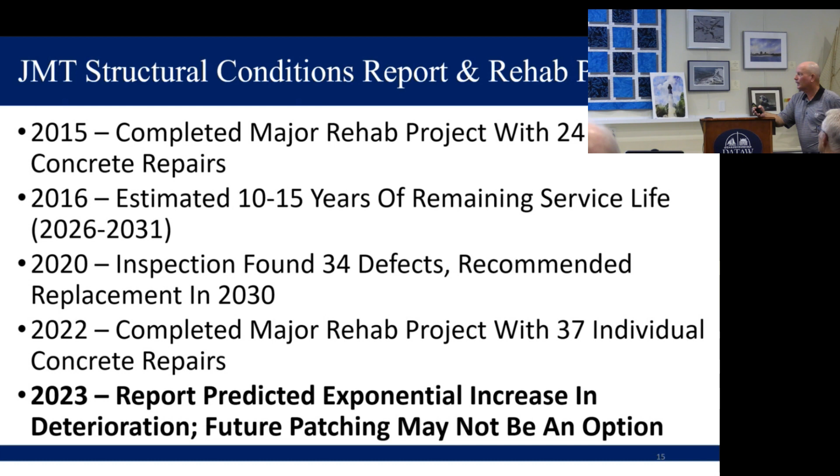Okay, exponential, and future patching may not be an option. That's a statement from their last report. Basically what it says is due to the delamination and strand corrosion—that bridge is a box beam construction, like a big concrete box with strands of wire, cabling, that holds it together. It's taking up salt water, and the chloride is causing the stranding to corrode. They say that it's happening at an exponential rate, and they feel the bridge is at that condition.

So hence that's why we're here today. The photograph on the right shows the corrosion of the strand supporting structures of the box beam concrete underneath the bridge. On the left is a typical repair that's been done over the years. This part is where they've cleaned it off—you can still see the corrosion on the cabling. And that's the actual wire lath they put up to apply the hydraulic cement to make the repair.

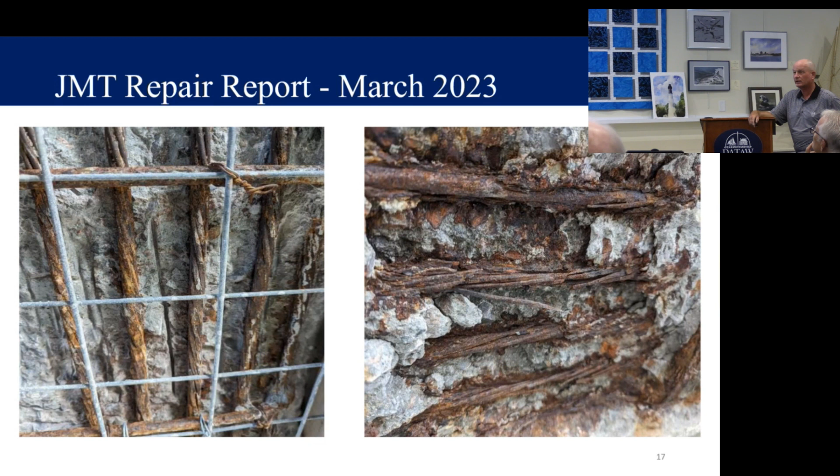So let's talk about elevation, which is important for what we need to do in the future and where we are today. The current substructure of the bridge is at high water basically. When we have really high tides, the water touches the bottom of it and splashes up, and it will continue to cause that deterioration. It's not going to slow down, as JMT said in their report. When we have storms or high water events like king tides, that puts the roadway at risk as well. The current bridge deck is 1 foot above the 10-year storm surge, and 18 inches below the 50-year storm surge.

Now, as I said, I've been here since 2003, and we've had two events that have overtopped the bridge. One of them was Matthew, and what was the other? So that bridge has been overtopped twice.

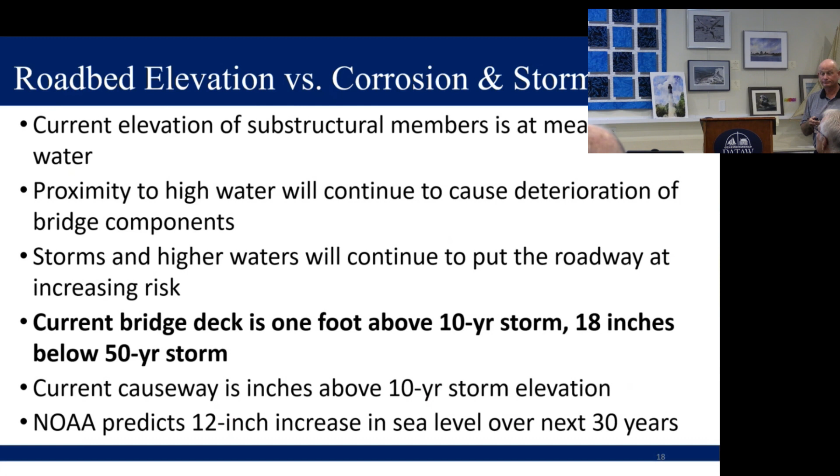Now, the current causeways are just inches above that 10-year storm level, and NOAA predicts that in the next 30 years we're going to have about another 12 inches of sea rise. Got to take all that into consideration.

So we also did geotechnical analysis of the causeways—remember, it's the longest portion of the bridge complex. You may have seen a big rig out there one day, like a drilling machine. It did borings all the way down into the subsurface of the causeways. What we found, and this is a civil engineering thing, is that we've got some issues with the asphalt. The causeways are up and down in elevation, and if we decided to raise them, we'd have to widen them. But the most concerning thing was that when we bored down to the 7-foot depth, we found that the causeways are unstable.

So if you were going to pile dirt on something that was unstable, do you think that would be wise? No. So based on all of this analysis and the impacts from the risk assessment we shared with you today, the bridge needs to be replaced within the next 5 years. That's the goal.

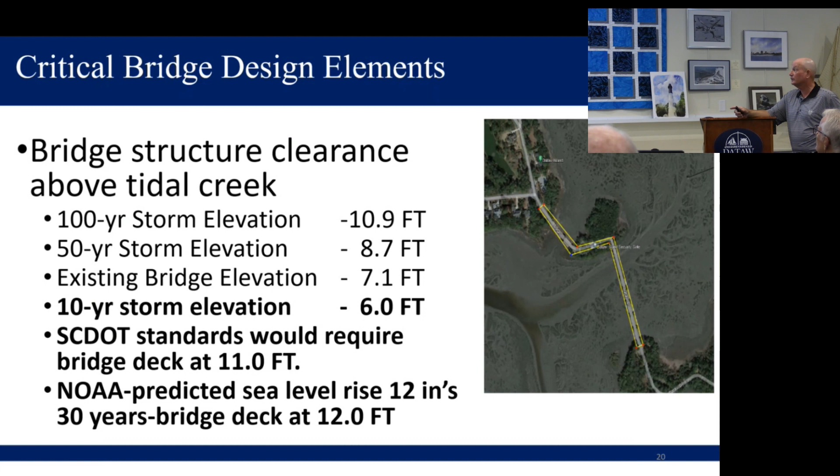So let's talk about where our elevations are. I talked about that 100-year storm—that's at 10.9 feet elevation. 50 years is 8.7, and our bridge is at 7.1 feet. The 10-year storm is 6. Do you see how close that is? South Carolina now requires that a bridge deck, if you deal with DOT, has to be at least 11 feet minimum above the existing elevation, and again, there's that 12 inches. So we've got to take that into consideration of anything that we do.

So let's talk about some things that we looked at, possibilities of what could happen.

First of all, we talked about raising the causeway. Now, raising the causeway would cause us to have to widen it because we have to be able to carry the dirt, the load of the dirt. But also what we found is there's regulatory requirements that are different for that, and also maintaining traffic during construction and dealing with the utility crossings.

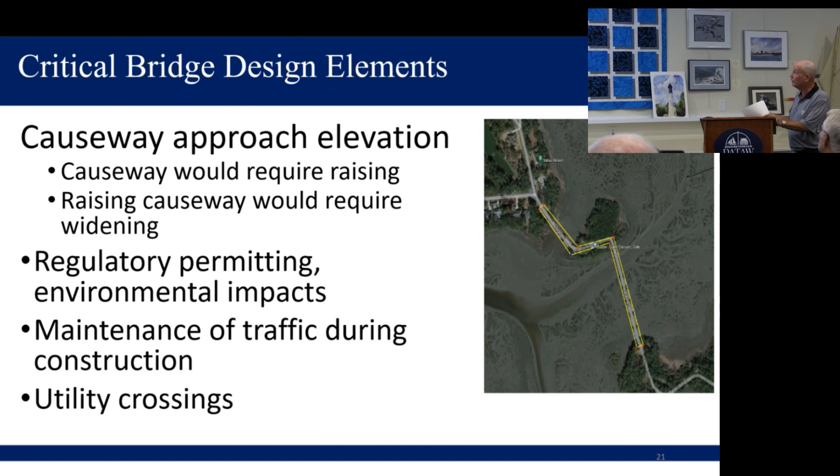Now, this is your current Google Earth view of what you drive on. This is Polawana, this is Dataw Drive, Polawana Island. Here's the causeway, there's the bridge. This is called Bobb Island, it's where the guardhouse is. Then you go across this secondary causeway, and then you're on Dataw Island.

All right, so we looked at three options here. We said, okay, what can we do and what we cannot do? Let's look at this. So the first option we looked at was raising the causeways, putting in a temporary bridge, and then doing a bridge complex later.

Bottom line, we looked at this. It has a tremendously high cost, but when we had that conversation with the regulatory agencies, they basically told us they would not issue us a permit to do this. And the reason why is because they do not allow you to infill the marsh anymore to protect the ecosystems of the marsh, and I'll show you why that wouldn't work in just a few minutes. So that was one thing we looked at, and we said we can't do that.

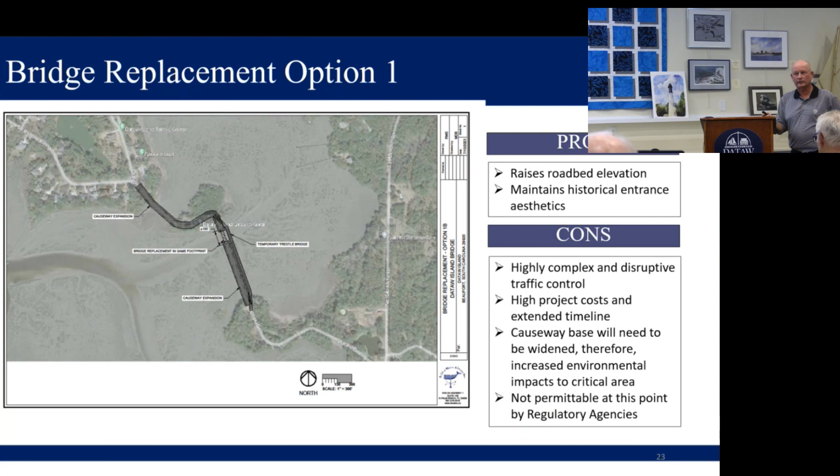Also, it'd be very expensive. Let me give you an example. If they decided that they would give us a permit, we would have to go in, build a temporary trestle bridge, which would be a bridge beside the other bridge. We would have to fill in one side of the causeway while you drive on the other side. And when we fill it in, we have to let it surcharge or settle for 9 months. Then we pave that side, then we surcharge the other side, and you have to wait 9 more months. That's 18 months before we could even finish building the bridge. So long timeline and a traffic nightmare.

But that's what that would look like. That's your current causeway, and kind of we looked at that from that perspective, and we just can't get that done.

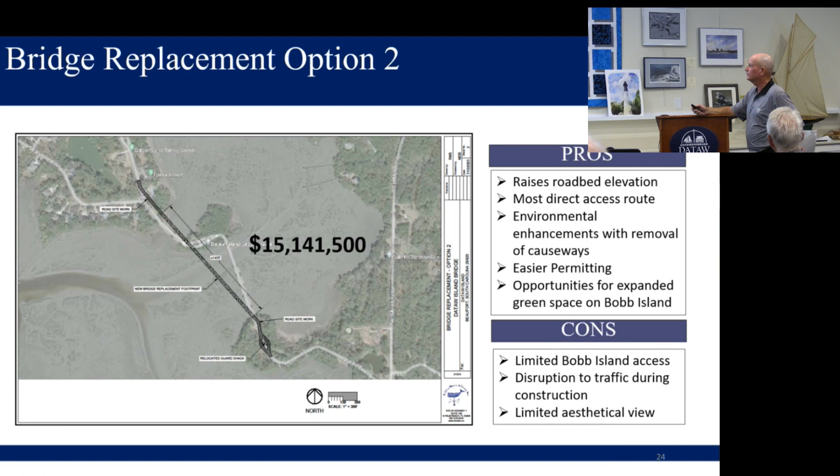All right, so this is what it looks like in a more blown up view. You can see now one of the things this does not give you is it doesn't give you that aesthetical view that you have now driving across the causeway on the right hand side, because you're going to be blocked more because you're on the left hand side versus the right hand side of the current complex.

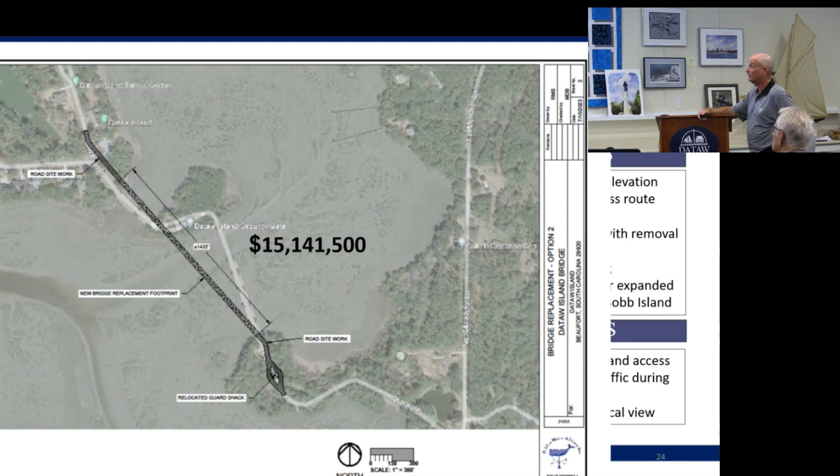All right, let's look at option 3. Option 3, it's in the same location. The guardhouse is here.

This goes on the right-hand side of the current bridge causeway. We land on Bobb Island and build a road, and then we pick up a secondary bridge and we land it on the right-hand side near the guardhouse.

This gives you that aesthetical view. You'll be able to see more back up this way because the clubhouse is to the north here. This also gives you a nice curve, and it gives us access to Bobb Island because we build a road on Bobb Island.

We don't build an actual bridge on Bobb Island, we build a road. It does have a little cost implication because there is more linear feet of bridge.

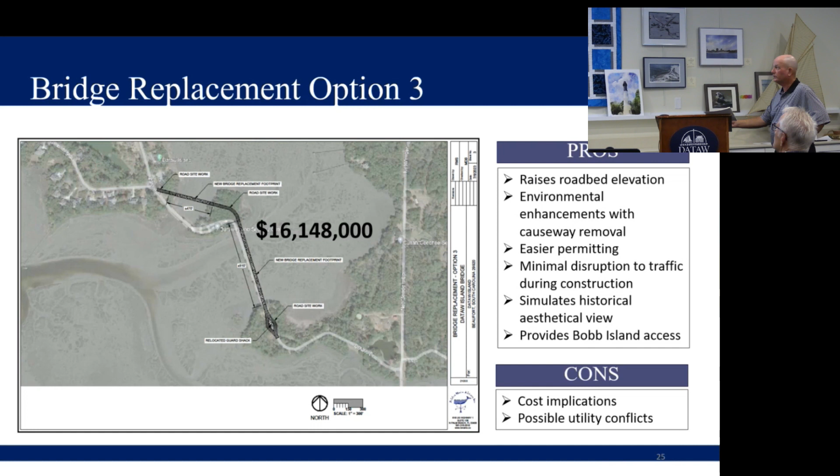This is much easier to build and will cause minimal disruption during construction, because we just do the tie-in over here while you're driving on this side, and we do the tie-in here while you're driving. However, this one comes with a more hefty price tag of $16,148,000. That's what it would look like from an aerial view from overhead.

Real quickly, this is what your current system looks like today: Causeway Bridge, Bobb Island Causeway. This is what it would look like. So you see, we bridge all the way across, land on Bobb Island, and pick up bridge on the other side.

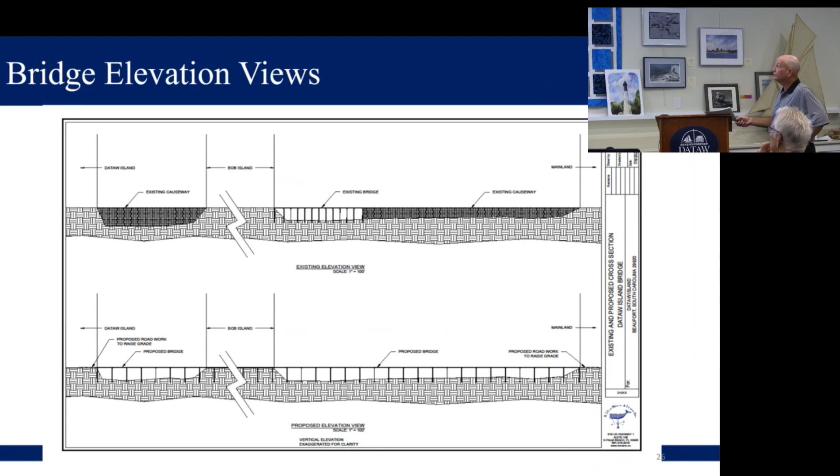This is why you can't. This is why you cannot receive a permit. This is the current causeway. This would be how much we have to fill in order to build that bridge.

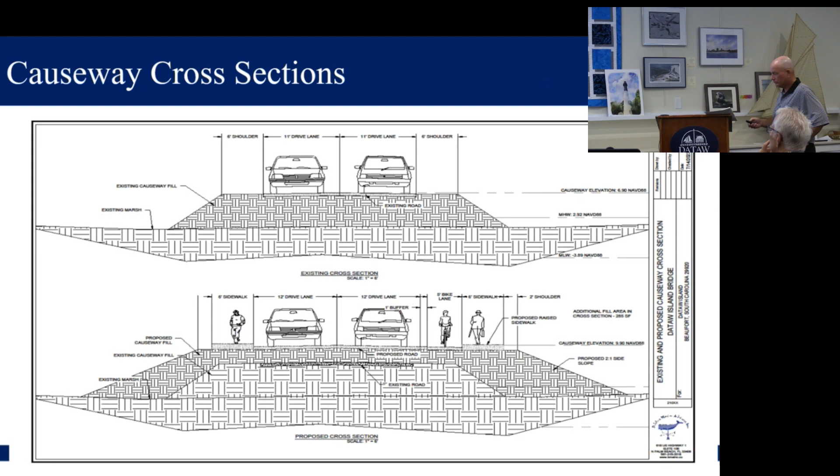This is what your current bridge looks like today. Our design is to make it a little bit wider and also add a bike path walk lane to that bridge so you can walk or ride all the way across. We do have some people who ride their bikes off the island, so we've included that in the design.

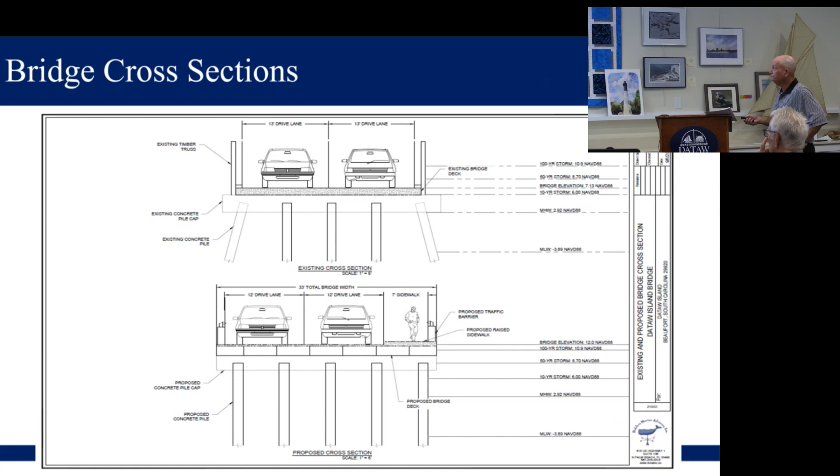We'll bid it in '25. We'll award the contract in January '26. We'll start building in March of '26 and finish in the fall of '27. That's how long it takes to build it.

I have stressed with the architects at BMA and the engineers, can we do it sooner? We can do it a little sooner. We might can get it finished in March or April of '27, about 6 months earlier. I think we can press the schedule.

Let me answer a couple of key questions before I turn it over to Bill Paddock, who's going to come up here in just a moment. Some people would ask this simple question - it's a great question, it's perfect - why can't we just replace the bridge in its location and leave the causeway?

It's lasted 35 years. They've replaced it. It could last 35 years. I'm not going to be here 35 years from now - why would I care? Right?

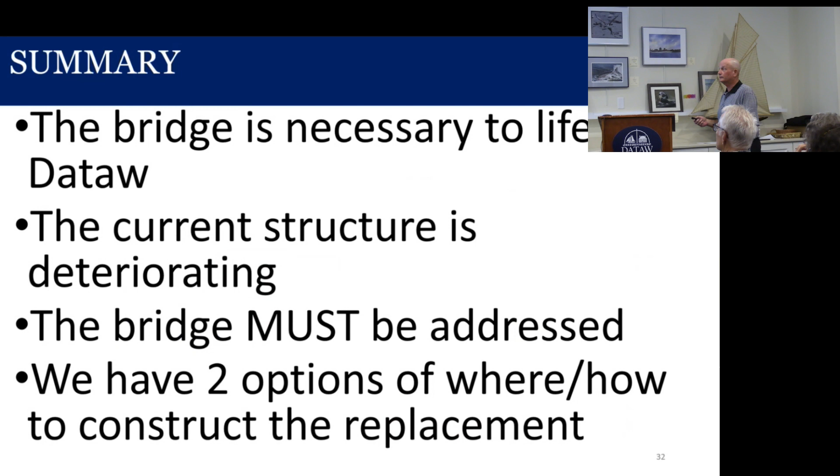So with that, I'm going to turn it over to Bill Paddock. Bill's going to talk a little bit about the water. Thank you, I'll lay it right there, Bill.

Good afternoon, folks. My topic is a little easier than what you just heard. What he talked about was necessary - this is aspirational. The rest of what you hear about today is going to be aspirational.

The committee I worked with - I've been here 25 years on the island. I love this place, and I'm glad we've done what we've done over the years to get where we are, but we've got to keep looking at more things.

Clay and Chris both served on the DIOA board and have been an important part of this project. The other three people have just been people who care about the beauty of this island and can help us make it more attractive for all of us.

Mike Hieronymus helped us with some of our sketches. The Rimkus engineers helped us look at the marina building, and I'll talk about that in a minute. Mike Murphy at Preservation Tree has helped us look at the trees and what can or should be done to care for them. He's been working on this island for probably 30 years helping us maintain our trees, and has been a great asset to many of us.

As Ted said, this was an interest expressed by all of you in the master plan report and the member survey, and Wood and Partners have all said we can do better at the Morgan River waterfront.

When we started to look at this, we realized we've got three different, very distinct, separate operations up here, and we thought we ought to try to pull them together. There are no walkways between these now - we think we need to add walkways to make it more coordinated. The property, about 11 acres, runs along behind the homes on Sparrow's Nest, behind a home up in this area, down here, and then follows the golf course back here. That's the North End campus, as we call it.

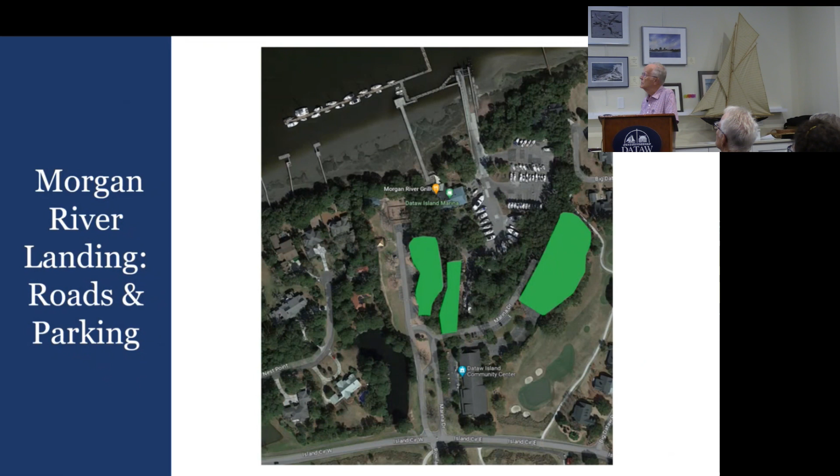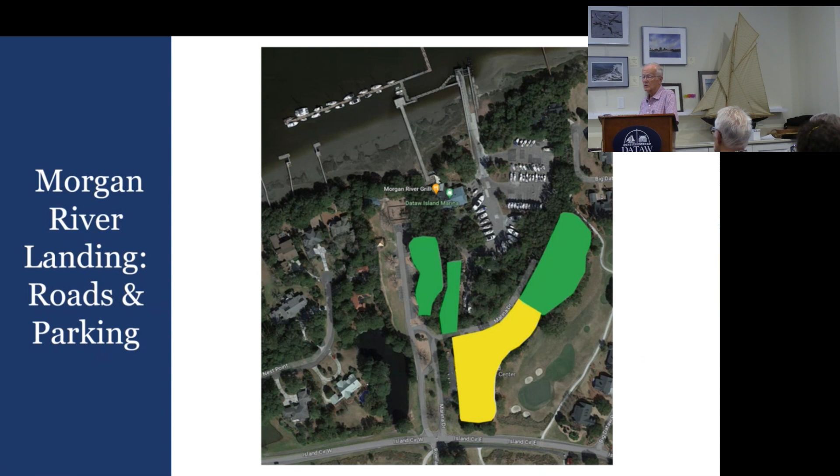Because we have three separate operations and the potential need for more parking, we had to look at the whole process - the whole enchilada - of what we've got up here. That's the green space we want to preserve; it's been wonderful and we don't want to get into it if we don't have to, so that's an important part of it. You've also got the community center taking up this space, the boatyard taking up that space, and the roads currently there. That's what we have today, which means the only part we've got left to really work with is this space back in here, since all the other stuff is taking over a lot of the other space.

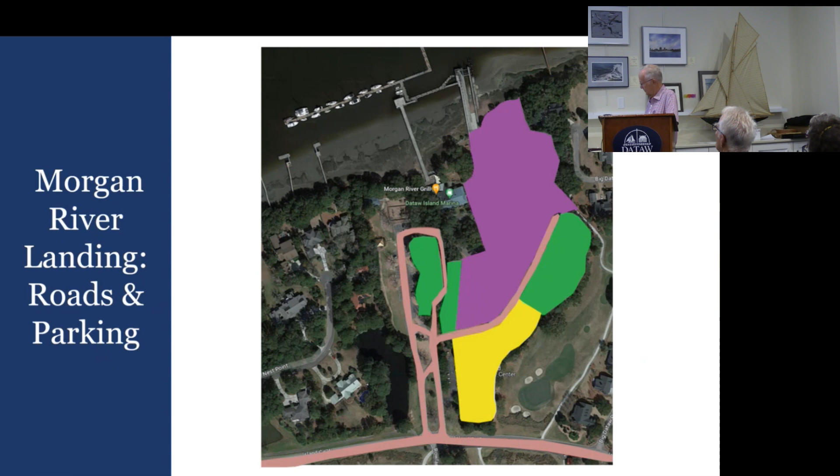I'd point out here that the gazebo is back in here, and the Morgan River Grill building is over in this area. When we looked at this, we said if the community center expands, that's going to mean more parking. If the wet slips or the dry stacks expand, that's going to require more parking. And if you do anything to expand the waterfront building, that's more parking too.

So we need to get to 165 spaces - this is the county rule in terms of how we're using the space. We've got to get to 165 parking spaces, which can be a combination of cars, golf carts, and bicycles. But we've got to make provision in our plans for all that to get any kind of approval. We want to do everything we can to preserve the trees and green space, and we want to provide walks to get from one part of the area to another.

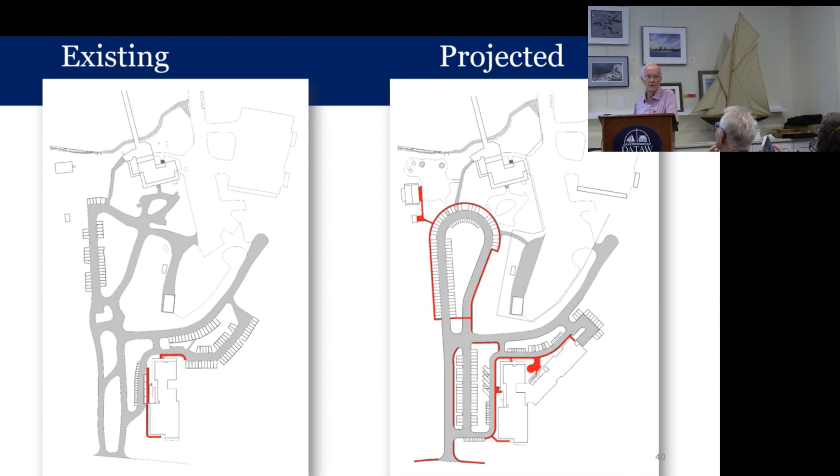Where's the waterfront? Anybody see any water there? We think there's opportunity for improvement. As everybody else has said before, we think these two facilities should come down.

Move the playground to someplace else on the island. The Common Grounds Committee has been given that challenge to see what everybody wants to do and where that should go. And as I said a minute ago, we think the gazebo ought to be moved back. This happens to be an area you could no longer build in today because of the setback requirements in the county, so we could not build it where it is today.

Trim the trees. When we're talking to Michael Murphy, there's some trimming we need to do out there because the trees are not healthy, and we can do something to make sure the health of the trees is good long term. We can also do some trimming for a better view, which is important, I think, for all of us.

Maybe put a fireplace, a large screen TV up there, so a group of your friends can watch a football game or a tennis match. A much easier, more comfortable gathering place. We want to expand it from the 1,500 square feet we have today to about 2,400 square feet, and move it back so we can take care of the setback rules in the county.

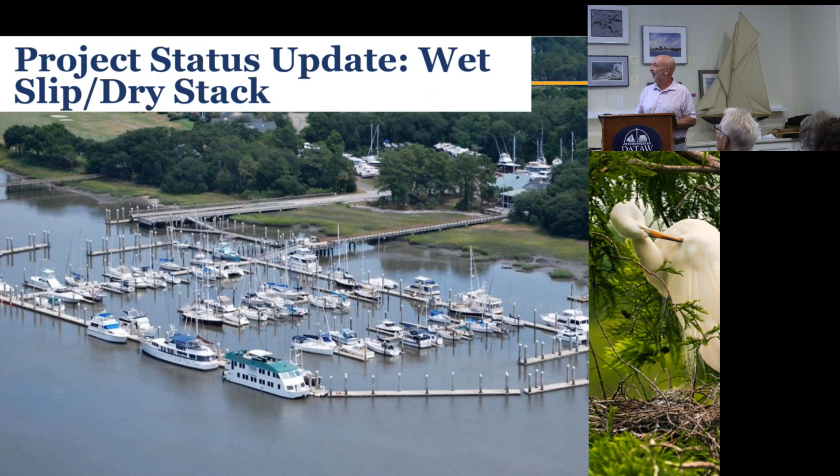All right, so my name's Scott Johnson. I chair the Wet Slip Dry Stack Advisory Committee. On the committee we had a great team of people: Martha Keat, who's here today, our DIOA board member, Al Deedle, Andy Shepard, Max Stone, and Rick Brown. All are very experienced boaters, very familiar with the operation at our marina, the functionality of it, what's working, what's not. They also have a lot of experience on many other facilities, marinas and marine facilities up and down the East Coast. We also partnered with BMA.

BMA is a marina engineering and design firm. They also worked on the bridge, with a lot of experience building marinas up and down the East Coast, and they've even done several marinas for private communities like us. Our objective, as our very innovative name would suggest - the Wet Slip Dry Stack Advisory Group - we looked at some wet slips, we looked at dry stack, but we also looked at everything else related to boating: all the docks, how things are handled, the boatyard, the fuel systems, what's working, what isn't, what needs improvement, how it's going.

So I think in the last 5 or 6 years there's been a lot of new faces coming here, so I think it's worth taking a minute to look at where we started with the marina, where we are today, and then where we're heading.

This is a picture of the marina around 2013, 2014. We didn't own it then. It was probably about a 90 slip marina, plus or minus. You can see here probably around 60 boats - that was pretty consistent, very busy, a lot of activity down there. We also had a dry stack - can't quite see it here, but back then we probably had 30 or 40 boats in the dry stack.

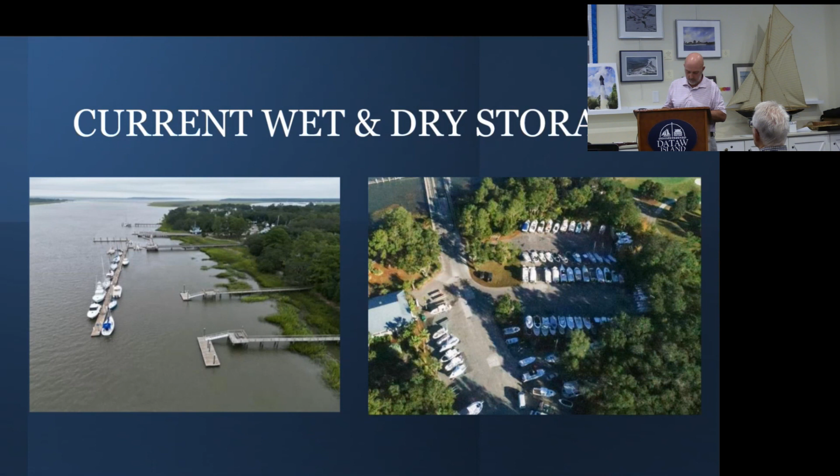So basically, the marina's back in business. It's very vibrant, very busy. It's a multi-million-dollar asset that you all own, and I think over the last couple of years it's actually paid for itself, covering its own costs including debt service. But with all that success, it's now exceeded its current capabilities, and the age is starting to take its toll down there.

So what did our committee find when we looked at this? Currently about 20% of our members on the island own boats, that's about 200-some-odd boats, and we've got more coming. We continuously get feedback from people looking at boats, on a waiting list to get one, or in the middle of shopping. So it's a very active time.

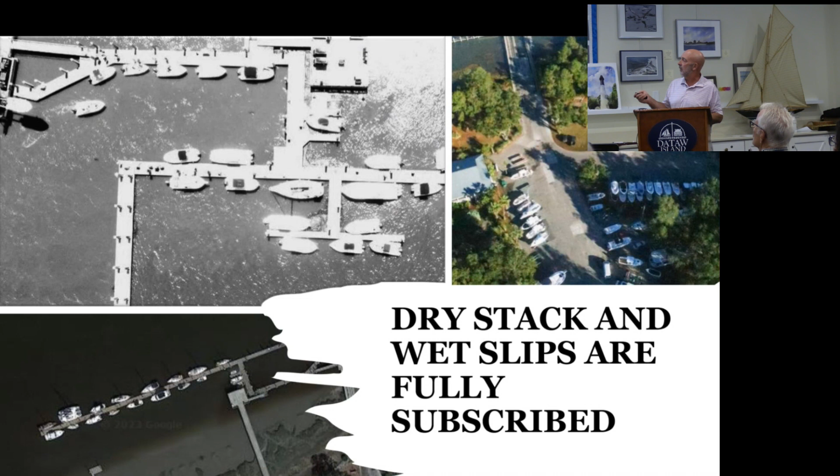But our wet slips and our dry stacks are full. Our dry stack has over 100 boats, and we've even got boats up on the grass now—not very efficient. Our wet slips have been pretty full too, no room. This is our bullpen, where boats come from dry stack to go in the water. We have over 100 boats here, and room for about 8 in the bullpen. That's led to some congestion, some accidents, potential injuries, and potential liabilities.

Our fuel system is right here, and as you can see it's pretty crowded. People coming in and out for fuel—it's busy, and we can't even get bigger boats in here to get fuel. Just as a tidbit, we've sold over 33,000 gallons of fuel just this year, so that's quite a bit of traffic coming and going.

We don't really have a lot of room for visitors. There's a lot of people traveling up and down the Intracoastal Waterway with boats—they go somewhere every night. We like those people to come here and visit because they get to see Dataw for the first time and see what a special place it is, but we've turned a lot of them away. It'd be nice to have an opportunity to bring in some more visitors.

Our docks are poorly protected. Our bullpen is pretty exposed here, and when the wind's blowing out of the east it gets really rough, and we've had some boats get damaged in here. On our wet slips, you can see it's fully exposed to the west, and we've had several boats get significant damage in there. I don't think it's right to have our customers exposing their boats to that kind of damage.

We've had several docks here that have survived—they've been here for like 35 years. They've been through storms and hurricanes, and they need to be replaced no matter what we do. They're getting in bad shape.

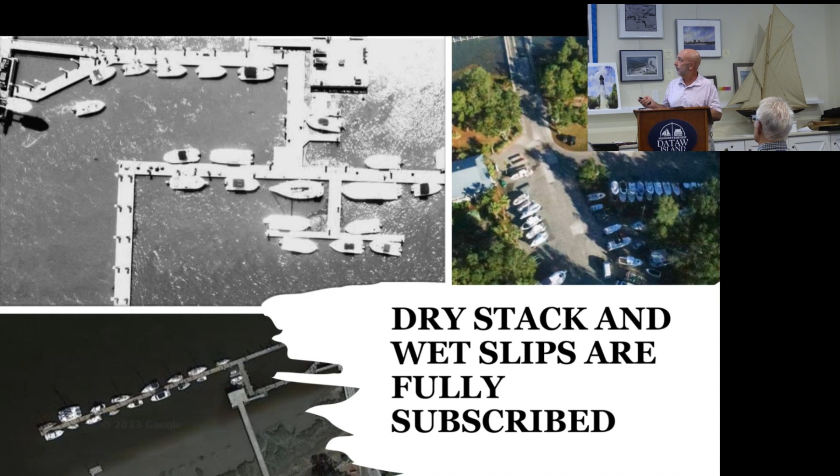So when our committee looked at this, what were the solutions? We worked with our marina staff, interviewed the customers here, and went to see other marinas in the area to see what they're doing. We came down to two major issues: expanding the dry stack storage, and refurbishing and expanding our floating docks.

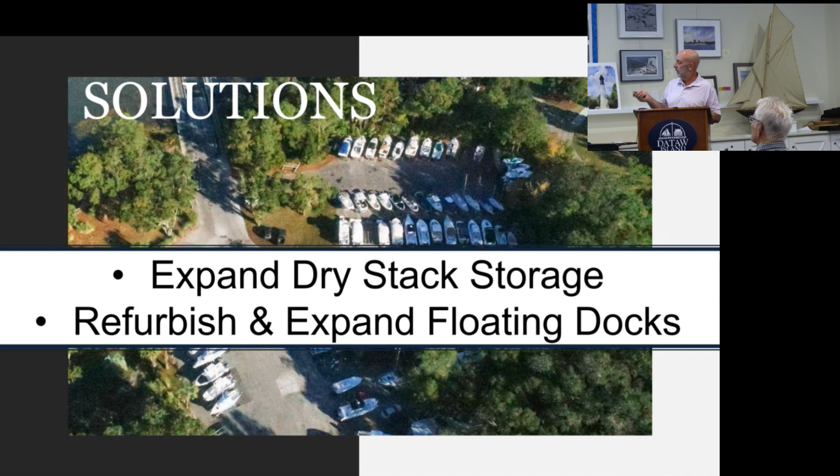So the dry stack, as I mentioned, we have over 100 boats, with boats scattered around the yard. We looked at a solution of putting in a 2-tiered rack in the middle of the boatyard—two racks, two-story racks.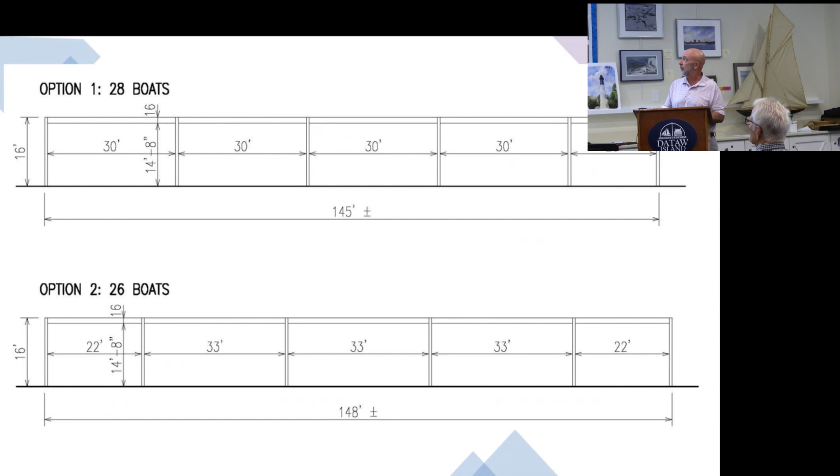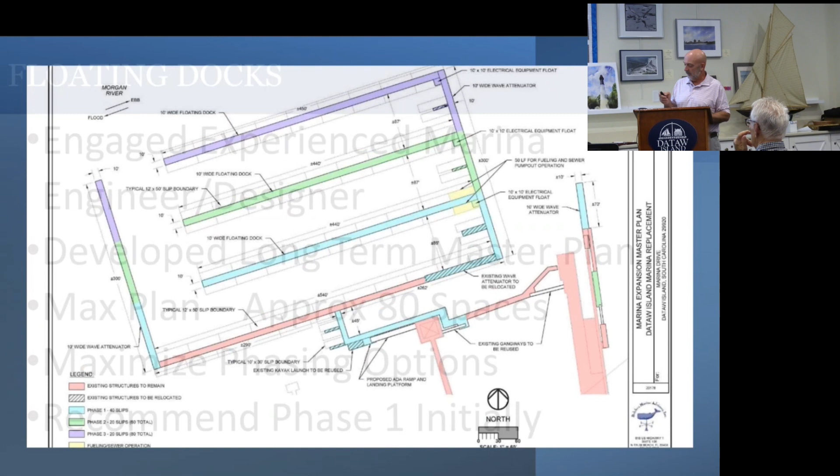On our floating docks, we worked with BMA, experienced engineers and designers, to develop a long-term master plan. Here's our master plan, just to orient everybody. Here's the existing pier head where we go down and watch the sunset, and here's that existing 400-foot wooden dock. What BMA is proposing would ultimately be about 80 spaces for boats.

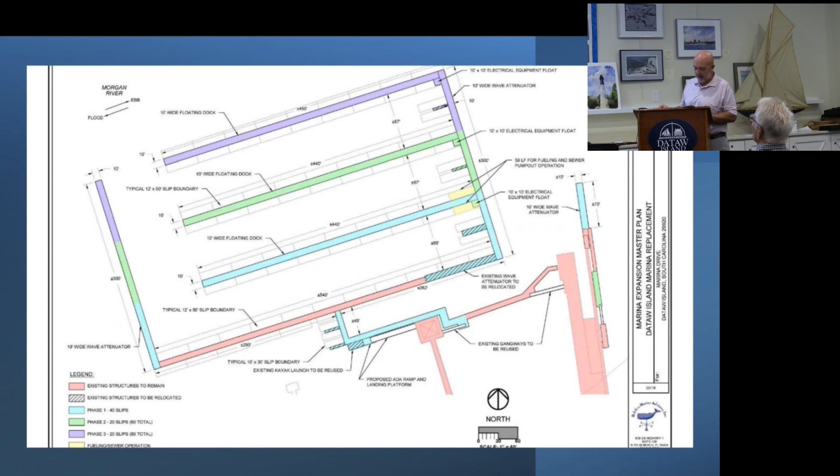One of our key facets was being able to phase this in. So we have phase 1, then phase 2, which adds about 20 more spots, and then phase 3. We're trying to be as conservative and cost-effective as possible. A committee looked at this and recommended going just with phase 1 at this time, again trying to keep a minimum investment with a maximum return. Phase 1.

Basically, we're adding space here. All total, we're adding about 22 spaces, about double what we have now. We're looking to add some wave attenuation here, heavier duty, bigger, stronger docks here and here, so that our boats are more protected and less likely to get damaged.

We were adding, moving the fuel system out to here, where it's much more accessible. Big boats can get in there. With more visitor spaces out here, we'd be selling more fuel. We would anticipate having 5 or 6 of these spaces kind of dedicated for visitors, both overnight big boats, sometimes maybe a week or two, or even just some of the small boats for the restaurant during the weekend.

On the dry stack side, we were looking to expand the bullpen here, which right now ends here. We basically expand it like this, doubling the size, adding room for about 12 more boats for our dry stack customers. That alleviates the crowding, reducing the risk of accidents, injuries, and potential liabilities we've had going on in there now with the crowd.

We're looking to add an accessible ramp here so everybody can access our docks. We're looking to put a wave attenuator here, which protects the bullpens, again trying to prevent damage to our boats in there, and also benefits the ability to haul larger boats out safely and more efficiently here by pulling them in and out with the travel lift.

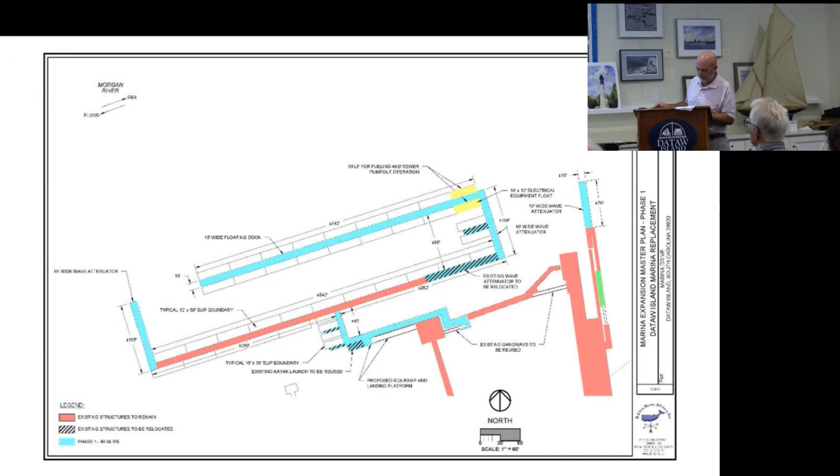So what does all this cost? As I said, we worked with BMA. They did a lot of detailed cost estimates, very detailed. Looking at our phase 1, which we recommend as being the most cost-effective plan, it's about $2.7 million. The other additional phases, phase 2 and phase 3, for additional about 20 slips each, are about 1.5 million. But we're focused on phase 1, around $2.7 million.

Just for talking purposes, there's something called the BIG grant, Boating Infrastructure Grant. That's a federal grant we could be eligible for. If you dedicate some space to visiting boats, you're eligible for the grant. We don't know if we'll apply for that, and there's certainly no guarantee you would ever get it. So we have not built that into any of the numbers going forward or Laurie's financial plans, but it's just something that could be a benefit in the future if we were to pursue that.

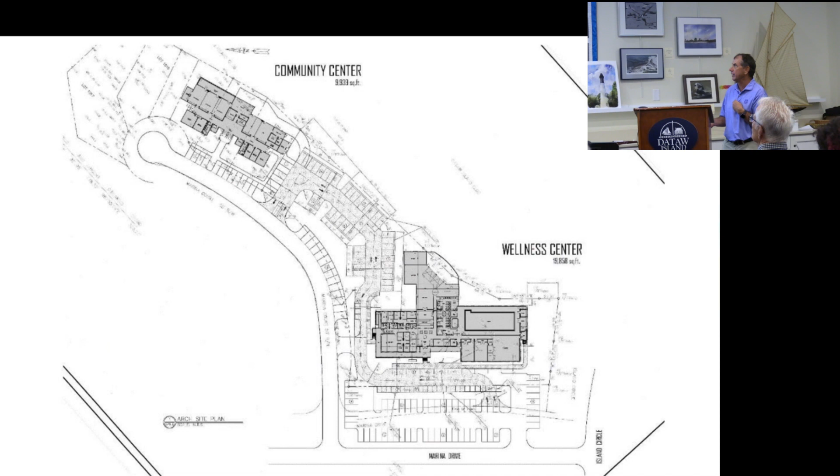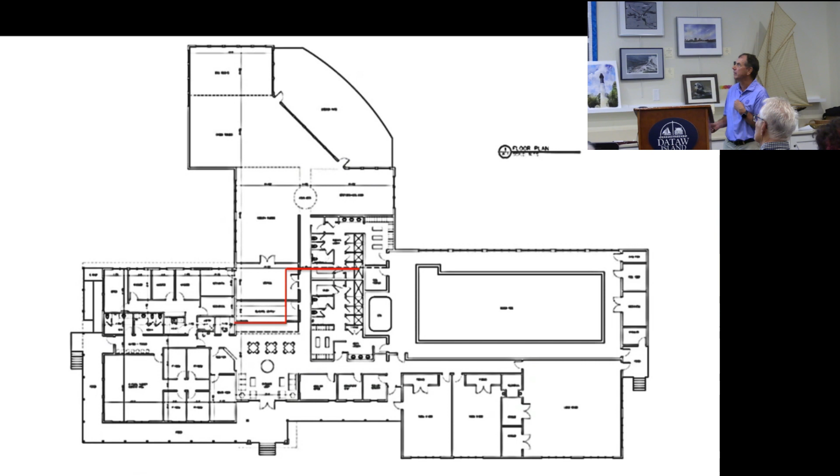I'll go through just real quickly here. This is the existing building, and in the new plan it's sort of the same. I'll describe it in a little more detail. This was the fitness center on the back, a bit of a funky shaped building with a patio looking out towards Morgan River 15 Green.

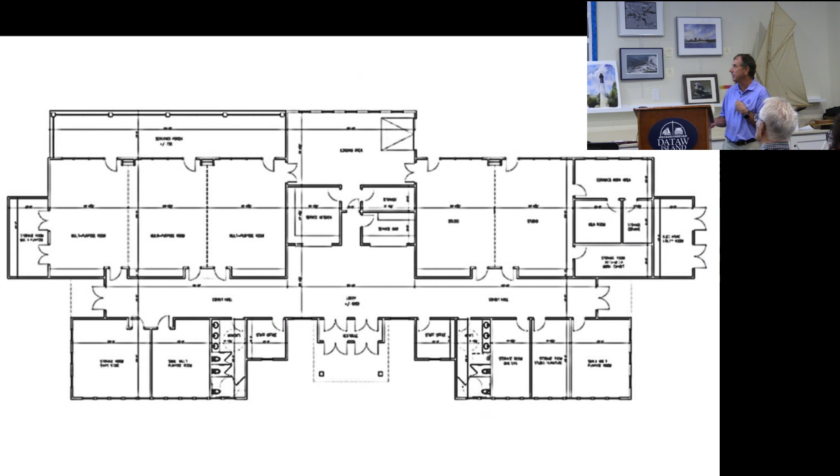The new building was this design basically, and I'll spend some more time and talk about these buildings. But one of the things we've heard was this porch, this loading dock, this service bar and kitchen here, 3 conference rooms, because it's separate space. There's some office spaces here, some storage and those sorts of things, was just bigger than we needed. The sort of feedback we got when we left the focus group was really very positive.

We asked whether the community centers expanded the content and scope of those 2 buildings. The feedback we got last spring was really strong. 83% of the focus group members said those are good ideas. We also asked if an up-to-date community center of sufficient size and offerings is important to current and future residents, and nearly 90% agreed with that statement.

We did a bunch of feedback, lots and lots of pages of stuff, but some of the key points were that the building we were proposing didn't have a lot of low country architectural influences, and we'd like to see more of that. They didn't want us building in the trees if we could avoid it. Separate buildings would cost more and staffing could be an issue, and the corollary to that is it was bigger than it needed to be. At that point we didn't have these meetings scheduled, but we were hearing folks wanted to hear what else was going on in the community, and the bridge was clearly something that was going to be coming up.

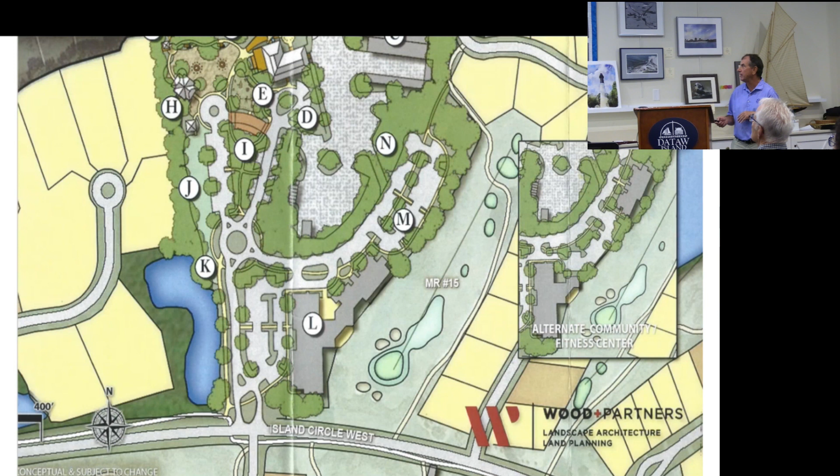So just reviewing real quickly what the master plan was, this is what we had originally proposed. Wood+Partners suggested we take this building and pull it up on the back here. They actually extended the parking back into those trees that we didn't want to take down. And as Ted mentioned earlier, fitness, meeting space, and green space were 3 of the top 5 or 6 things the community indicated they were interested in last fall.

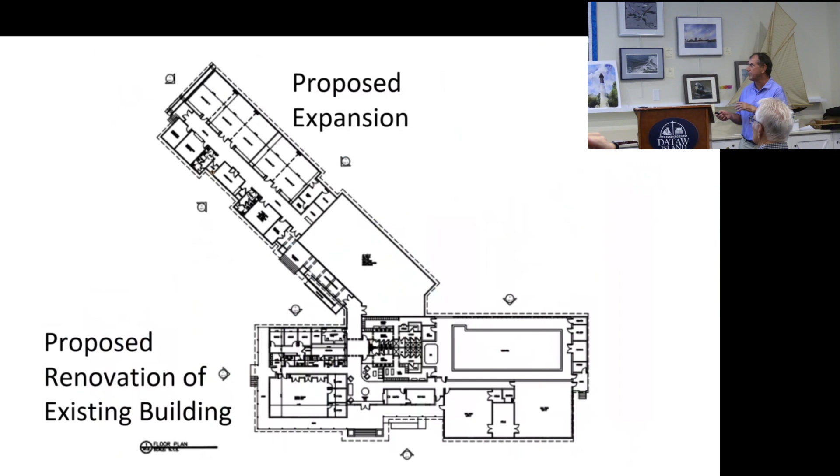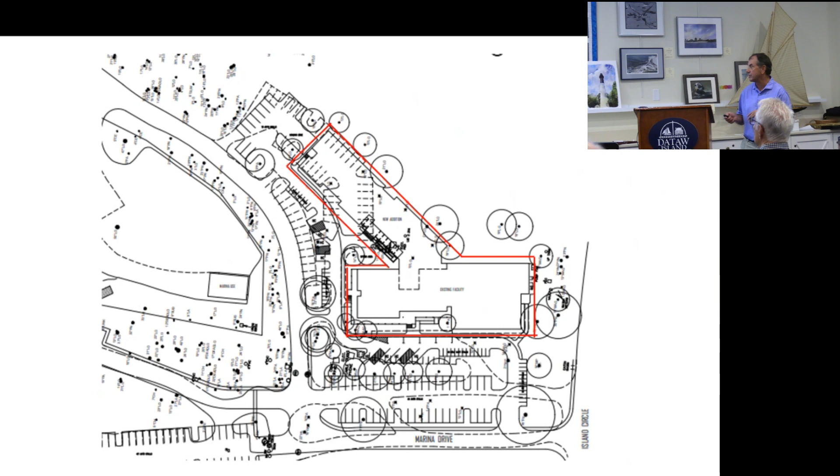So this would be the current building with its redesign. There are no physical changes in the pool area. The locker rooms, which we've heard a lot of feedback need to be bigger and renewed, are tired and need it, so this is a larger locker room space for both men and women. We would take the current gym out of this space and make it a group fitness class space. The current group fitness space gets a little smaller because we add some storage, so we could offer additional things down here, like doing yoga and Tai Chi at the same time, and down the road we could add spin bikes and offer those sorts of things.

This would be the lobby reception room, and basically lunch space for the staff in this building. The current room that we're in now becomes PT space. One of the key things is we need additional PT capability down here—members currently sometimes can't get a PT appointment for as long as 2 or 3 weeks when they need it, and some folks even have to go downtown to do their PT, so we're offering more space here for that. The current arts room would get a couple of rooms added and become the services area for massages, reflexology, and any other sorts of things we might offer. Folks out of the locker room could still go to the pool or to fitness, and when we split this you just see one half of a doorway here. So now I'm going to speak about the addition space.

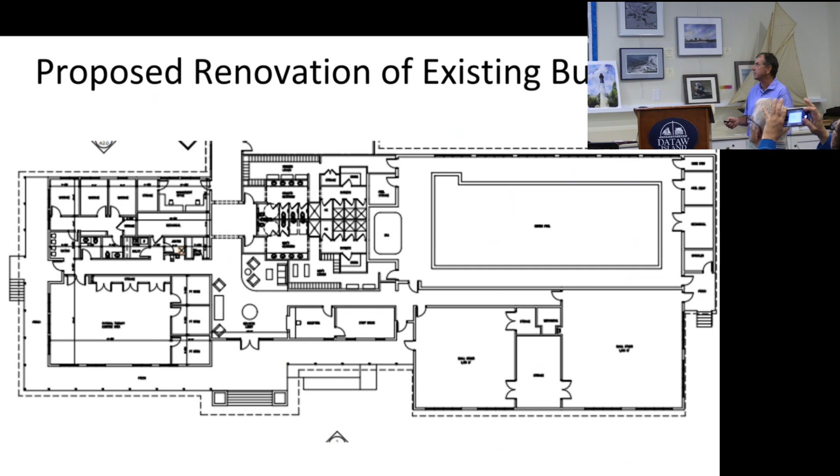So this is the other half of the doorway here. You'll be coming out of the locker room and into the new gymnasium space. We've heard over the years a lot of comments that it's awful crowded in there, and there's some machine equipment that we need to have that we don't have, and there are no free weights in there.

So this new design space would have a mirrored back wall here, and this area down here would be free weights and benches and things to work with that. Over here on this side is where you would put all the strength equipment, the machines that we have today, with a couple of additions.

All the aerobic equipment would go along this side with views. This is a windowed wall, you'll see in a minute, that looks out onto the golf course area. And then this space down here is open for stretching and those sorts of things, which we really have no room for today. People who try and do that get stepped on when folks step off of aerobic equipment down there now.

So that's what we're proposing. I'm going to show you exterior renderings of this space from here and here and here. And the key thing I forgot is this space here is now the key meeting space for the community. This space we're in now is about 1,200 square feet.

What we're proposing here in these 3 rooms is 3 600-square-foot spaces, so half again as big as this room. These are dividing walls which can be pulled out, so you could do bridge here and mahjong there and have a meeting down there all at the same time, which we can't do today because our spaces cannot be divided. But anyway, so that's what that space is.

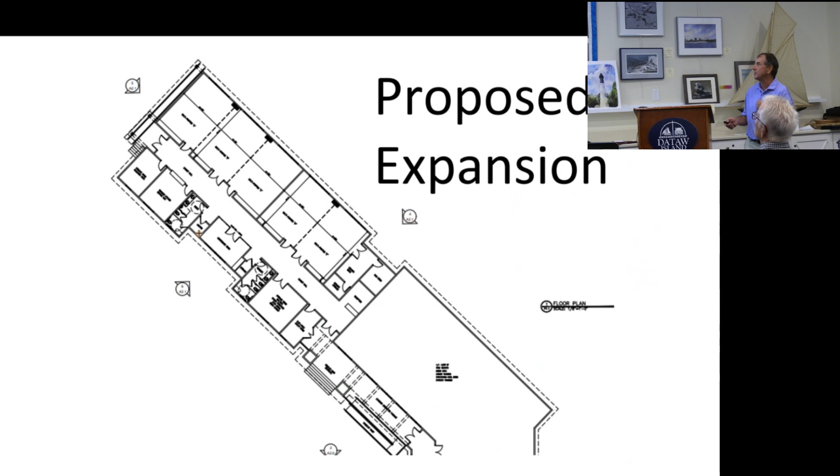So now I'm going to show you those external renderings so you can see what this could look like. This is a proposed look at the new expansion. This is the gym space back here. Here's the ramp—you come out across the front and then into this new space down here. On the front side with the lower roof is the storage space, the warming kitchen, the restrooms, those sorts of things. So that's across here.

Then the roof—I'll show you the end profile, which gives you a better look here. It goes into the back where all the multi-purpose spaces are. These are clerestory windows that bring light into that hallway. So this is what it could look like from the end.

We have that space up front. The multi-purpose rooms are along the back. This exposed truss is then carried into the interior rooms, which I'll show you. And this is that 10-foot wide hallway with light coming in from the top.

Along the back, this is the existing pool. So this is sort of what's being built here. These are the fitness windows, and these are the multi-purpose windows here.

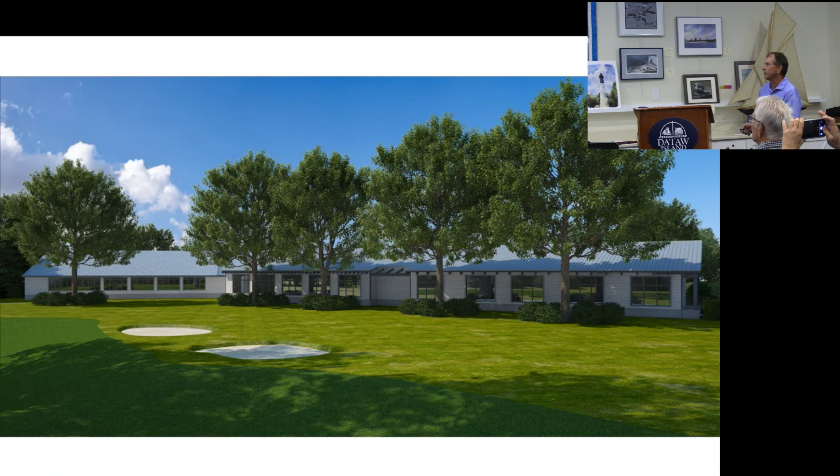These trees do exist and could be saved out there. There's actually a mound here that sort of hides the pool area, but it does provide separation and is far enough away from the golf course that we're not going to be slicing balls into those windows.

This is the front of the existing building proposed. You can see we've proposed changing the asphalt roof, which is getting to the point it's going to need to be repaired or replaced anyway at some point in the near future.

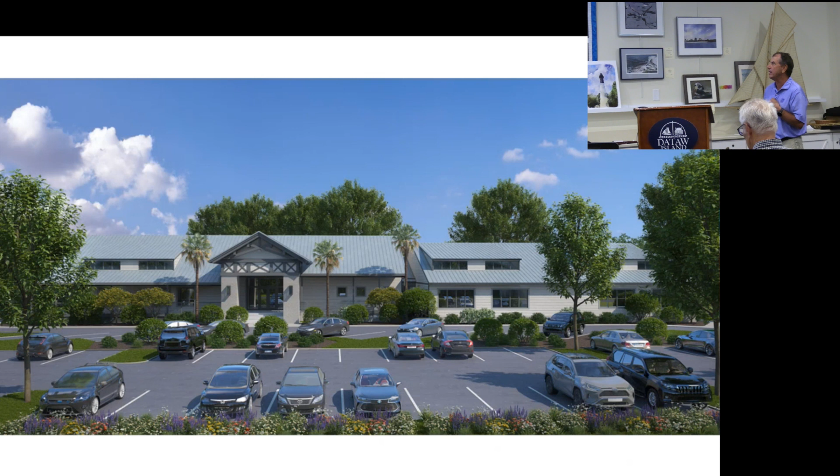These 2 dormers exist today. This would be a new dormer that we'd add just to break up this large expanse of roof down here. And actually, these are fakies — they don't bring light in anything, they're just up there as architectural details.

We would actually have this one work so you brought light into this space down here, which would become the PT space. We've added an entrance space here. The door's the same, nothing's changed there, but it just makes it consistent with the other building.

And on the end of this building, we would add an exterior truss again to tie it into the other buildings. So this is sort of what you would see from the end, looking at the current building and the entrance to the new building.

Three more slides just to show you the inside. This is the architect's idea of that exhibit hallway. These are just standard things, but we would use some sort of a hanging system like we have here

where the arts folks and the quilters could hang their fine work in here. You can see part of those exposed trusses here and that up space where the light would come in and down into the space. We wouldn't be looking to get new tables and chairs.

This was the architect's idea of that. We would probably stay with the sort of thing we have, but to give you an idea, these are the 3 rooms, and these are the potential dividers. We would have exposed trusses up at the top, and those rooms would all have windows that could look out to the golf course area.

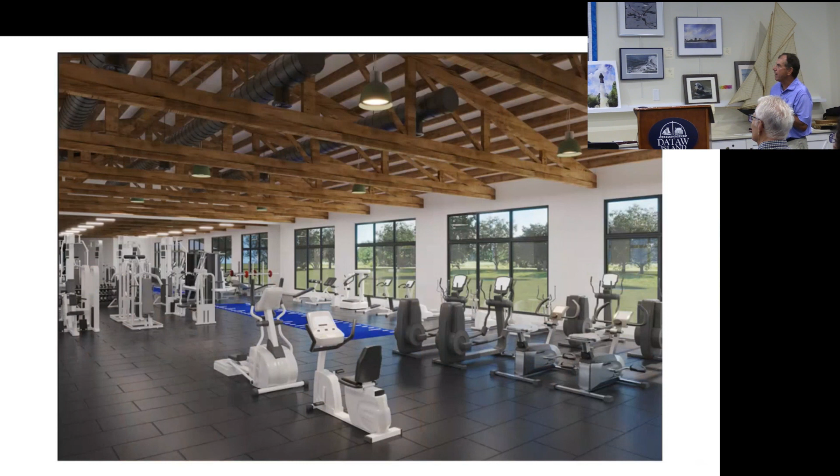Here is the gym — very good rendering, almost too good, because the room actually ends right here. That's that mirrored wall, so it looks like it's twice as big. Again, exposed trusses. Back here is the weight stuff, the machines here, the aerobic equipment, and stretching space down in here.

So we've actually been at this, or our group was at it since 2021, so the other teams have really just started through calendar year 2023. We've had a little bit of a head start. So these plans are actually out getting design development, or some folks call it 60% design.

That we will, this coming month in October, be able to take to a couple of local construction firms that could do a project of this size and get an actual price for this. This 9.8, which we're using today, and the numbers that you'll see going forward, is basically a per-square-foot estimate that we've done at this point in time. We've actually had one set of feedback that brings it in lower than that, but until we actually take it to a bid, we don't know that.

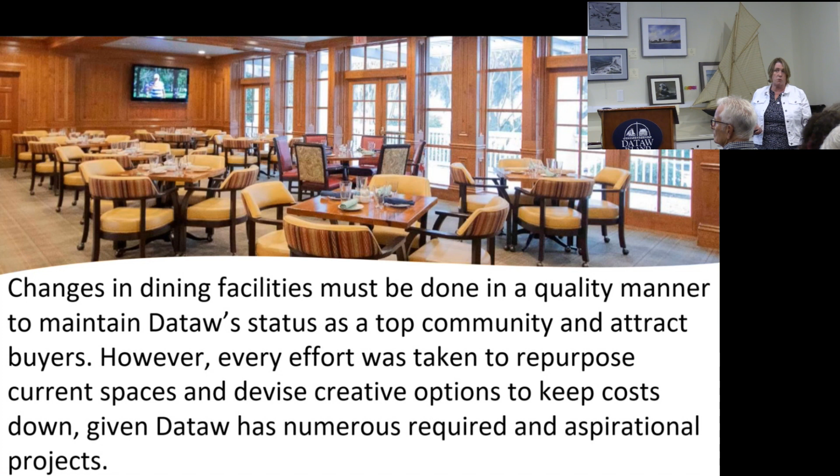So we started out with what I call, in Star Trek lingo—big Trekkie here—our prime directive: we knew that any changes we made to our dining facilities had to be done in a quality manner so we could maintain and enhance our property values and our status as a premier community. However, we thought we had to take every effort to repurpose current spaces and devise creative options to reutilize spaces that don't get a lot of action today, that are sitting empty, just so we could keep our costs down, because Dataw has a lot of important needs and wants, and we only have one wallet.

So here's what we thought: let's do a 2-phase plan. Phase 1, we could move quickly and at a lower cost to alleviate our pub crowding, and give our members a completely distinct restaurant that takes advantage of Dataw's stunning water views. Phase 2 is coming a few years down the road. It would address our aging infrastructure in the kitchen and clubhouse, and offer a third dining option—a sports bar and a screened patio in the now underutilized Tides Edge Grill.

Let me give you a little taste of what we're talking about. Currently, what we have at Cotton Dike Deli is a prep area—there's no kitchen there. Everything that's cooked, bacon, whatever it has to be, is cooked in our pub kitchen and carted over there.

It's why the deli has to be closed on Monday, because we'd have to open our clubhouse kitchen. And that means bringing in the dishwasher, bringing in cleaners, bringing in the chefs. It's expensive to do.

If we figured we actually have a restaurant here, a little restaurant at the pool with an actual kitchen, that would give us the ability to stay open on Monday. It also gives us the ability to do catering events at the pool, like 4th of July or parties at the pool, more fun at the pool.

And most importantly, it gives us a second full kitchen at Dataw, because when we talked about our 40-year-old kitchen, that's going to have to be fixed. We're going to have to shut it down, start tearing out walls, tearing out plumbing, tearing out electricity. We actually have maintained that kitchen over the years. We've done renovations partially, we've done repairs. We haven't been irresponsible with it, but it needs to be fully gutted and updated.

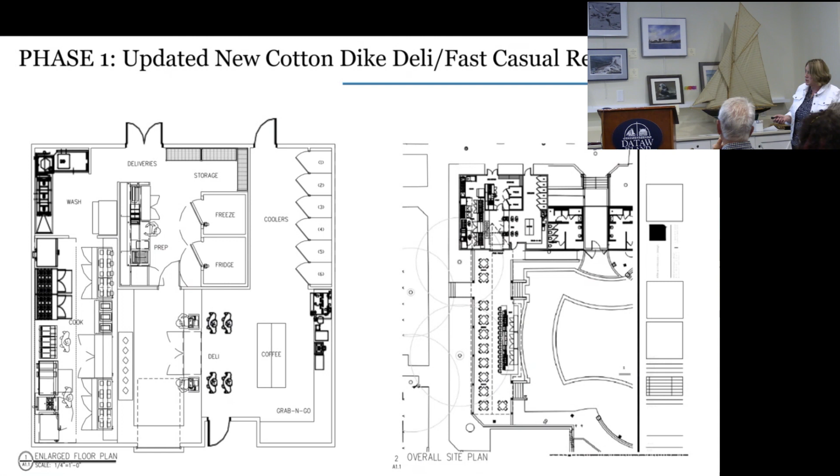So you could get up, there's currently these steps and handicap ramps. They already exist. We're going to leave them there. There's a bar here. People like to sit and have a drink by the pool. Pretty simple structure, nothing, no walls.

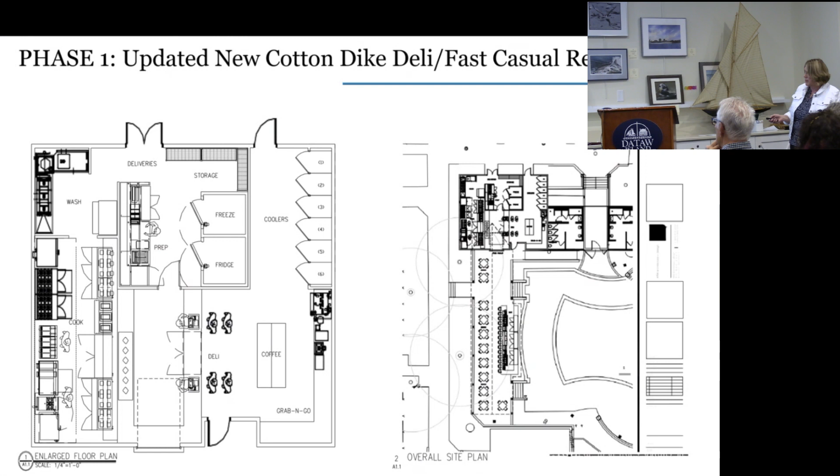Second thing we're going to do is, the good news is we already have money to do it and we're already working on it. It's not an assessment. We took a look at this patio and that was one of the first things that we started to do and said, it's not very attractive. We'd like to have a place where people could sit and have cocktails, wait for their table, come in after bocce or pickleball or tennis or golf. And so House and Social Committee is already starting to work on looking at how we redecorate this.

Some considerations: Phase 1 offers a really quick, cost-effective solution for additional dining and a distinct menu choice. It leverages the Cotton Dike Deli's popularity. Fun fact, 30% of all lunches today are already served at the Cotton Dike Deli. It would be open for dinner, and we'd like to keep it open on Mondays as well. And then we hope to expand it to breakfast at some point.

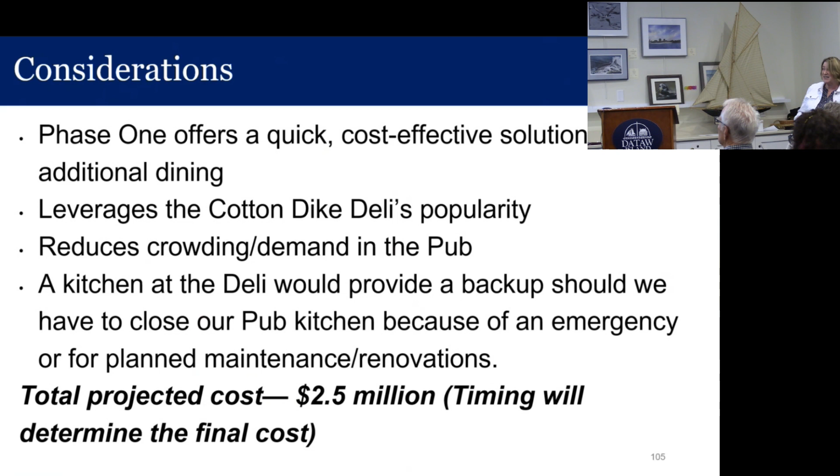The kitchen at the deli would become a backup if we have to close our pub kitchen for planned renovations or for an emergency. And the total projected cost, including a 20% contingency, is $2.5 million.

Here's our glimpse ahead, down the road. We would repurpose the underutilized Tide's Edge Grille as a casual tavern. The reason is that we have so many rounds of golf now being played at Dataw that people aren't finishing up at 2 or 2:30. They're coming in at 4 and 4:30.

So they're sitting there having a drink, enjoying their cocktails and appetizers, and it's dinner time, and those tables are also under demand for our members. Nobody wants to tell a member, hey, could you get up and leave? We want you to be able to sit there, even till midnight if we were open that late, but you could sit there till 7 or 8 o'clock at night.

You should be able to enjoy yourself. We looked at that Tide's Edge Grille and said, well, it's overflow for hamburger night and we use it for fine dining. But what if we had a lively sports bar there? Then our pub became our more refined, quieter, upscale restaurant, so we'd have two very distinct areas with two very distinct menus—finer, quieter, nicer food, and a pub grub menu and sports bar. To do that, we'd have to gut the kitchen, because our kitchen would be too challenged to serve two restaurants.

We then refresh what I call our Irish pub decor, to make the dining room look more like it's sitting on the coast of South Carolina. That's a very small investment comparatively—it's a refresh. It's paint, it's better carpet. I know you all want to keep that green carpet, but it's going.

A new bar top, something beautiful. We would keep the bar in the main dining room—to tear it out would cost a lot of money, and we just don't think we should spend that. It's a waste of dollars, frankly. Plus, it would be nice to have a bar in there, and a new bar top is fairly inexpensive.

So here's the idea of what we could have for our new sports bar. Currently, we have this pretty little area in the Tide's Edge Grille, and we'd get a bar. Fun thing is, I told the architect when he first came out, I said, you know that line from Jaws, 'we're going to need a bigger boat'—well, we're Dataw, we're going to need a bigger bar.

Somebody told me in one of the other meetings, do we really need this extra bar? Then I talked to a former board member and she said there was debate about whether we even needed a bar in the pub at one point, and she said it's turned out okay. Yeah, we need another bar.

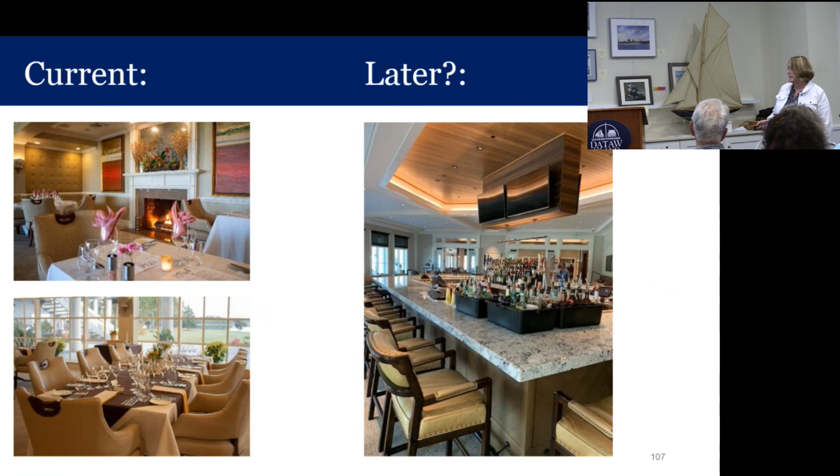So one of the things we said was, let's see how we can do this without spending a whole lot of money. What do we already have as assets and how do we use them better? We walked outside the Tide's Edge Grille and recognized that we have a roof, a patio, and supports. All we need to do is screen this area in and put a bar on the other side. Not all that expensive to do. We could have tables out here.

Sonia Fales was up in North Carolina at a club, and it has exactly what we were talking about. She rather excitedly sent me this photo. Ours would have screening, but this is pretty much what we're talking about for the new sports bar.

We could start out with something pretty simple—a hot dog bar with gourmet toppings, and a salad bar with lots of different salad choices, so that it doesn't tax our kitchen as we redo it.

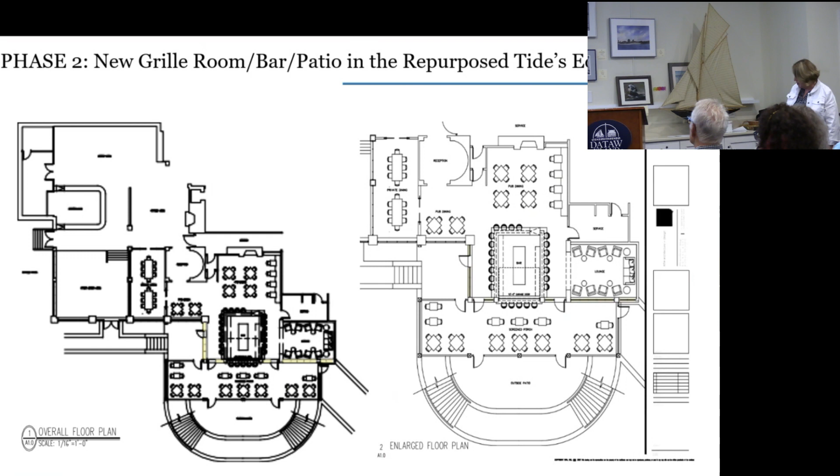We also have that little outdoor patio there, outside the screening, where we could put a few tables.

In summary, our members told us dining is really important to them. We can make some long-term improvements with very minimal investment. So expanding the Cotton Dike Deli and building the kitchen there, and renovating the top patio, is phase one. The sports bar and the Tide's Edge Grille, renovating the kitchen and the clubhouse, are part of phase two.

And finally, before I turn it over to Hank to give you all the numbers I know you've been waiting to hear — I know that you're getting a lot of projects and a lot of numbers thrown at you, and it can be a little overwhelming. It certainly has been for us as board members as we tried to prepare this and simplify it and figure out how to present it.

But this is also a really exciting time in Dataw. We are really fortunate to be here now. We have a chance to fix up our community for the future, to preserve and maintain it. Every day we all drive across a bridge somebody else built for us. So what we do today is going to right-size our community — we know how big we're going to be now — and it's going to enhance our own property values.

We're all owners of this island. When people come here to look at Dataw, they don't come to look at my house and say, hey, I want to buy that house. They look at the community first, and then they look for a house there. So what we're talking about, just as we maintain our own property values, are projects here that we think will enhance and maintain your property value.

You're going to tell us what you think needs to be done and how much you want to spend. But you asked us for some ideas — that's what we're giving you. And now Hank is going to tell you how much it's going to cost you. Thank you.